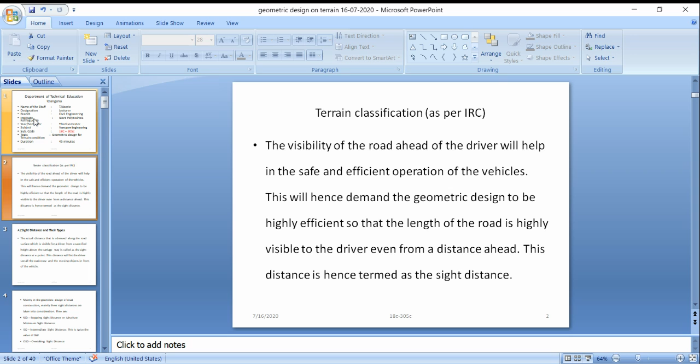So there are different types we are going to see. First, sight distance is the actual distance observed along the road surface which is visible for a driver from a specified height above the carriageway. So he should be able to observe the road surface, and a specified height should be there. There will be some height for the vehicle, and from that height he has to observe the road surface. Observing from a certain height is called the sight distance.

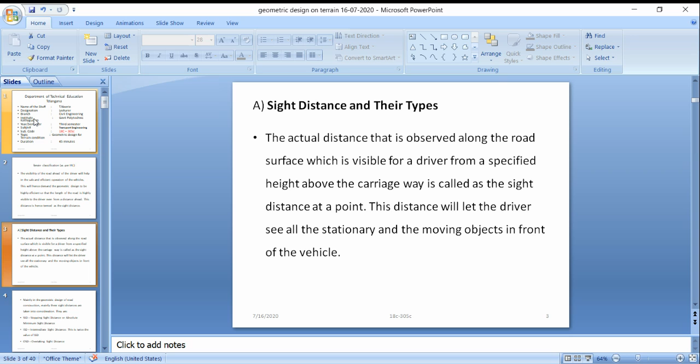This distance will let the driver see all the stationary and moving objects in front of the vehicle. So when he is driving, he can observe from that height all the stationary and moving objects in front of the vehicle. That height from the carriageway we have to fix. So that is called the sight distance.

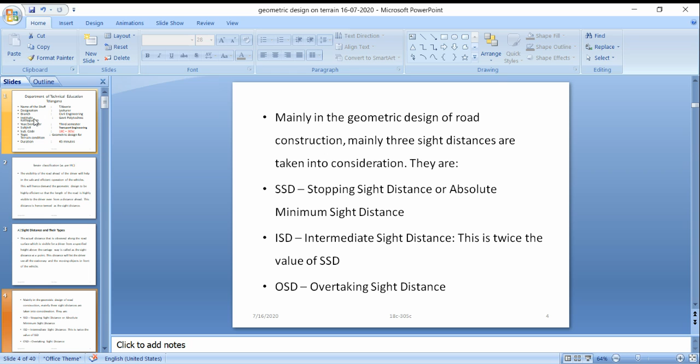Next, in the geometric design of road construction, mainly three sight distances are there. They are SSD, stopping sight distance, or absolute minimum sight distance. Next comes ISD, intermediate sight distance. This is twice the value of SSD. If the SSD is, for example, 2 meters, then our intermediate sight distance will be 4 meters, twice. Then OSD, overtaking sight distance. These are the three distances we are going to see.

In addition to these, there are headlight sight distance and safe sight distance. The distance that is available for the driver during night travel is called the headlight sight distance. When a driver is driving at night, he should also be able to see the objects at night. The distance that is available for the driver during night travel is called the headlight sight distance.

At night, the driver is facilitated by the illumination of the headlights. There we can see lots of light in the dark area. Without that, he cannot go safely. So the illumination of the headlight is also important.

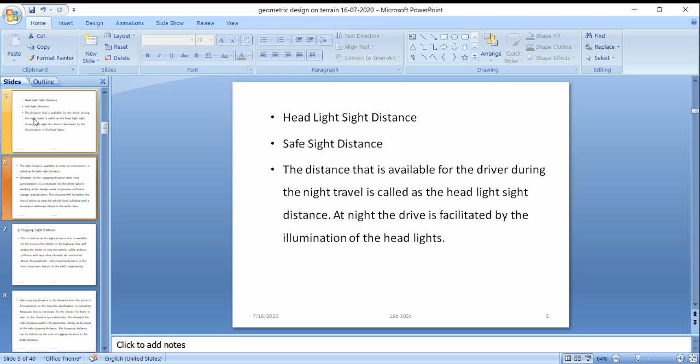So next, the sight distance available to enter an intersection is called the safe sight distance. So when he is entering the junction also, he should have an idea about the crossing, which vehicle is coming to take a turn. So that sight distance also he should have an idea of.

Whatever be the stopping distance taken into consideration, it is necessary for the driver who is traveling at a design speed to possess sufficient carriageway so that this distance will be within the line of vision to stop the vehicle. So, stopping distance taken into consideration. So here SSD we have said, that is nothing but a stopping distance. So he should have a consideration. The driver who is traveling at a design speed possesses sufficient carriageway distance.

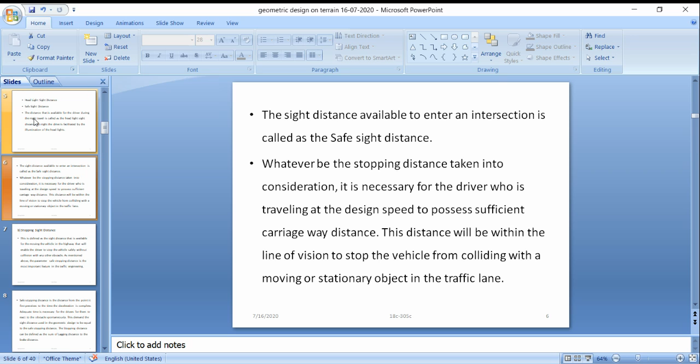We already designed for a single lane, it should be 3.75 meters. So at the design speed he was traveling, that distance will be within the line of vision to stop the vehicle from colliding with a moving or stationary object in the traffic lane. So at the junction, he doesn't have an idea what vehicle is coming around the turning. So for that line of vision, there is a chance of colliding. He should have a vision to stop the vehicle at that location.

So the stopping sight distance is defined as the sight distance that is available for the moving vehicle in the highway that will enable the driver to stop the vehicle safely without collision with any obstacle. So the main parameter for this one is the safe stopping distance, the most important feature in traffic engineering. So here we can see the stopping sight distance is available if we applied any brake, that will enable the driver to stop the vehicle safely without collision.

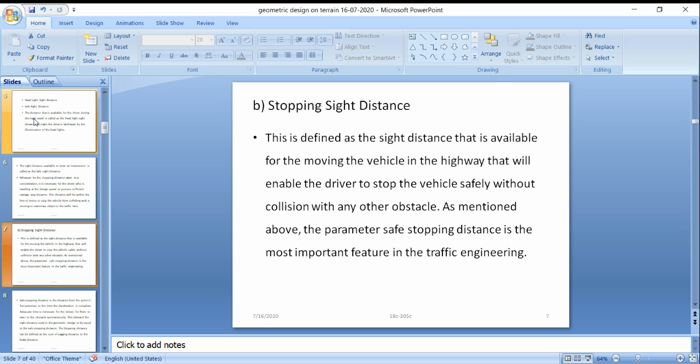Some stopping sight distance should be there. If he applies the brake, it will not stop at that location only. It will move forward. That stopping sight distance should be there for a vehicle. So that is the main parameter, and that is the safe stopping distance. Safe stopping distance is the distance from the point it first perceives to the time the deceleration is complete. So he will get a signal, and in a second, decelerate. He should stop like that, from perception to the time the deceleration is complete.

So adequate time is necessary for the driver to react to the obstacle spontaneously. So this demands the sight distance used in the geometric design to be equal to the safe stopping distance. So if you're designing a road, in that we have to see the sight distance. Safe stopping distance should be equal to the sight distance, so that the stopping distance can be defined as the sum of lag distance and braking distance. I mean to say, lag distance.

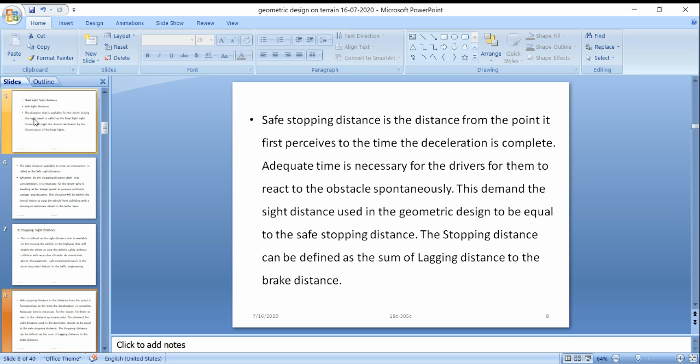It should react. The reaction will take some seconds. So those seconds are to be considered in the design, so that the vehicle can stop safely. So that lag distance is to be considered. So the lag distance is the distance that is moved by the vehicle in a time period t at a velocity of v. So applying reaction time, that is the t for a vehicle, that lag distance we are calculating.

So that lag distance is moved by the vehicle in a time period t at a velocity of v. So hence lag distance is velocity into t. That is nothing but velocity into t. So the distance that is traveled by the vehicle during the operation of braking is called the braking distance. So what is meant by the braking distance? The distance traveled after the brake is applied, that distance is called the braking distance.

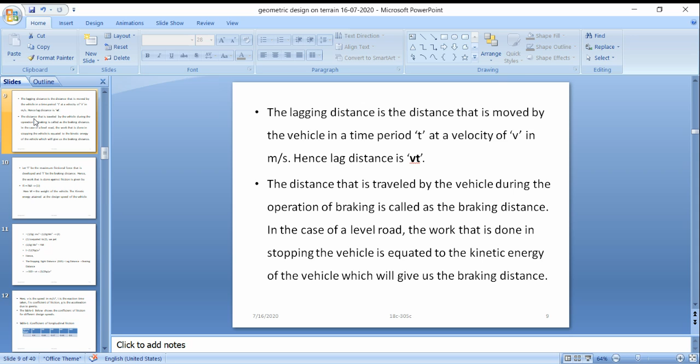In case of a level road, the work that is done in stopping the vehicle is equated to the kinetic energy of the vehicle, which will give us the braking distance. So if it is a level road, that kinetic energy will be applied for the braking distance. So next, if we are applying brakes, there we are creating some friction. Applying the brake means having the velocity, it should have the time also. Where the distance is there, we have the velocity and the time.

So sorry, there F is the frictional force that is developed and l is the braking distance. So there we are developing the F and l. So F is the frictional force and l is the braking distance. We apply the force on the vehicle. Brake force is applied means braking is done. So after the brake, the vehicle moves a little bit. That is the braking distance, and in that I have to add the weight also.

So here we are calculating the weight of the vehicle. So the weight of the vehicle, there the kinetic energy attained at the design speed of the vehicle. So here F is nothing but the frictional force into the weight of the vehicle into the braking distance. This is the equation. So here we apply the kinetic energy.

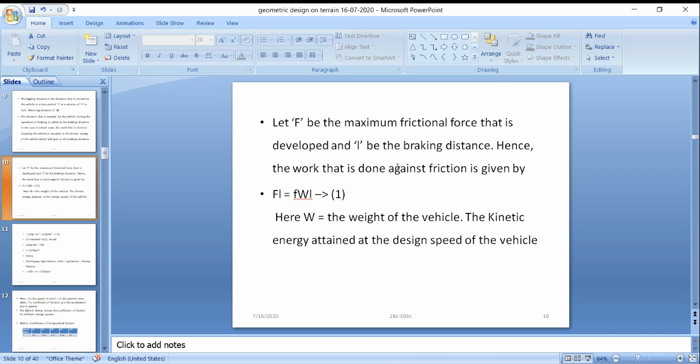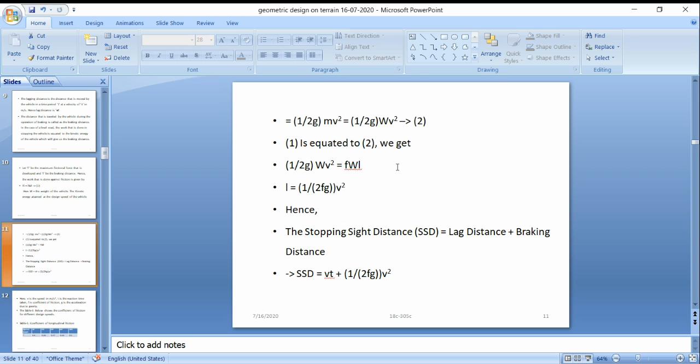And here all these were considered for the formula, Vt plus v square by 2fg. Sir, here some speed is there. For the speed less than 40, it should be 0.4, and if it is 40, 0.38, let the friction as given.

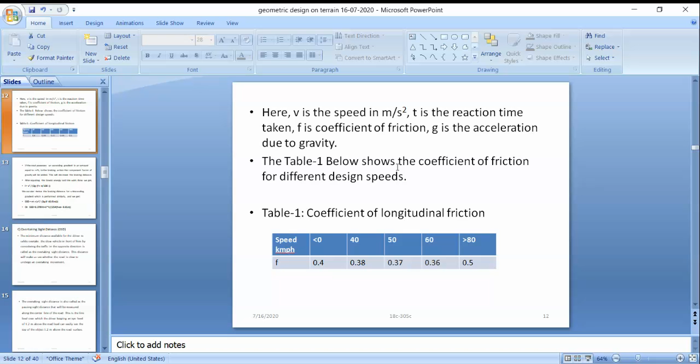If the road has an ascending gradient of n percentage, the component of gravity is added to the braking action. This will decrease the braking distance. After equating the kinetic energy and the work done, the formula is Vt plus v square by 2g into f plus n by 100.

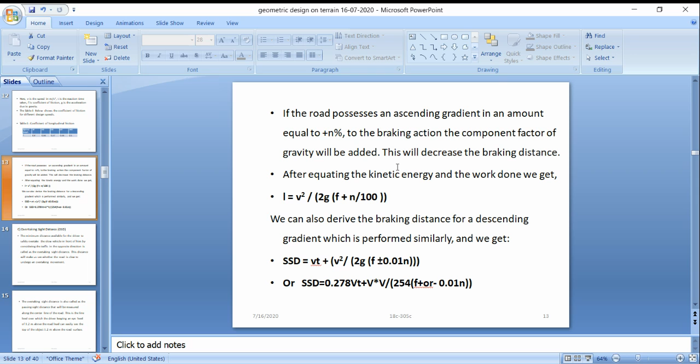So he also derived the braking distance for a descending gradient, so the stopping sight distance is equal to Vt plus V square by 2g into f plus or minus 0.01 n. Or it can be written as SSD equal to 0.278 Vt plus V square by 254 into f plus or minus 0.01 n. So this is the stopping sight distance formula.

Next comes the overtaking sight distance. Here the minimum distance available for the driver to safely overtake the slow vehicle in front of him by considering the traffic in the opposite direction is called the overtaking sight distance. So this distance will make us see whether the road is clear to undergo an overtaking movement.

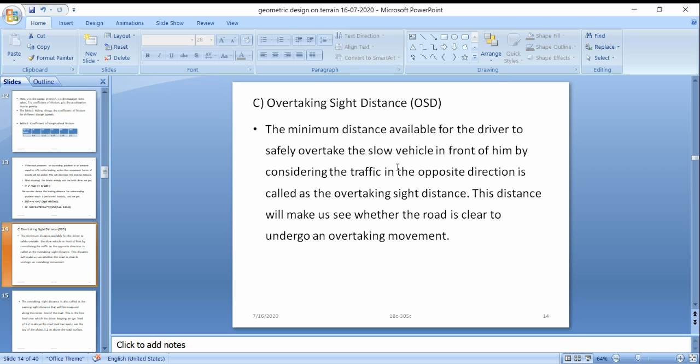So if we're going to overtake, we have to have visibility of whether the road is clear to overtake or not. We already saw the geometric design of carriageway width. As per the IRC, a single lane is 3.75, the vehicle width is 2.44, and for side clearances it comes 0.68 plus 0.68 on either side. So that much distance is provided to see whether the vehicle can overtake or not.

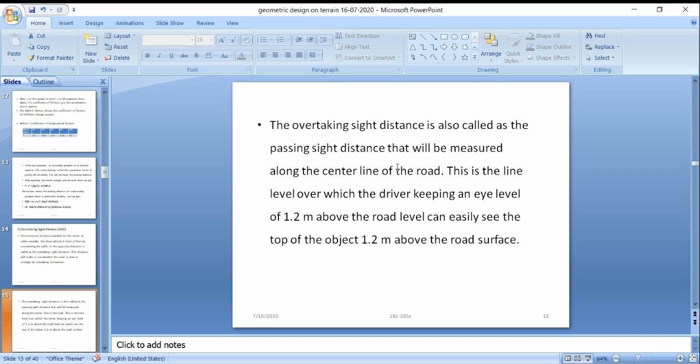Okay, so the overtaking sight distance is also called the passing sight distance, measured along the center line of the road, with the driver's eye level at 1.2 meters above the road level. So he can easily see the top of the object above the road surface. On the moving vehicle he can see objects at a height of 1.2 meters.

So what are the factors affecting overtaking? The first factor is the spacing between the vehicles. If you want to overtake, the space should be there to overtake the vehicle. Next, speed of the vehicle. If you want to overtake, he will increase the speed. Next, the gradient of the road. If the road is more steep, then the gradient is also considered.

The acceleration rate of the overtaking vehicle, whether he can go or not. Velocity of the vehicle, and also the driver's skill and the reaction of the driver. So with all these, the driver also has to think whether he can overtake or not.

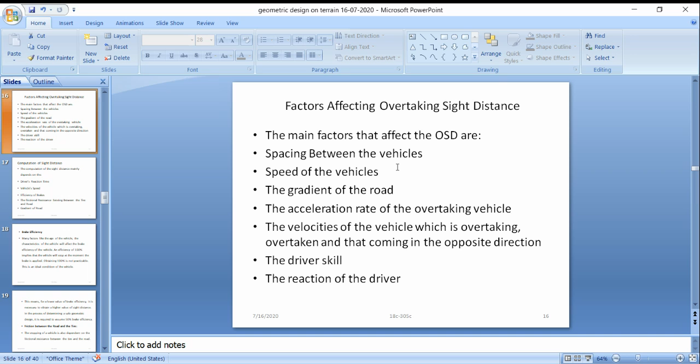It will depend upon, if it is a heavy loaded vehicle, then it will depend on the skill of the driver. If suddenly, while overtaking, anything unexpected like animals is there, then the reaction of the driver is also important at the time of overtaking.

So, for the sight distance, we have seen stopping sight distance, intermediate sight distance, and overtaking sight distance. So the sight distance really depends upon the driver reaction time. So first main consideration for

the formula we have considered, SSD, stopping sight distance, is 0.278 Vt plus V square by 254 into (f plus or minus 0.01 n). That formula we have seen. So in that we have seen that first is the driver reaction time, vehicle speed.

After reacting only, we can say the vehicle speed and also efficiency of the brake, the frictional resistance existing between the tire and the road, whether the road is wet, weather conditions also apply. So on the weather conditions only, the tire and road friction will be developed, and gradient of the road. So the sight distance will depend on all these factors.

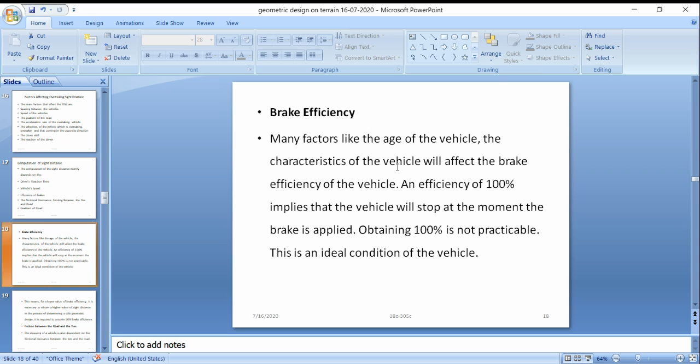The characteristics of the vehicle, and efficiency of 100% implies that the vehicle will stop at the moment the brake is applied. So obtaining 100% is not practical. This is an ideal condition of the vehicle. So at the design, we will think the brake applied will be 100% possible, but practically it's not possible. It is an ideal condition depending upon whether the brake is suddenly applied or not.

So this means for a lower value of the brake efficiency, it is necessary to obtain a higher value of sight distance. So, in the process of determining a safe geometric design, it is required to assume 50% brake efficiency. So for braking, we have to consider not 100%. We have to take 50% only.

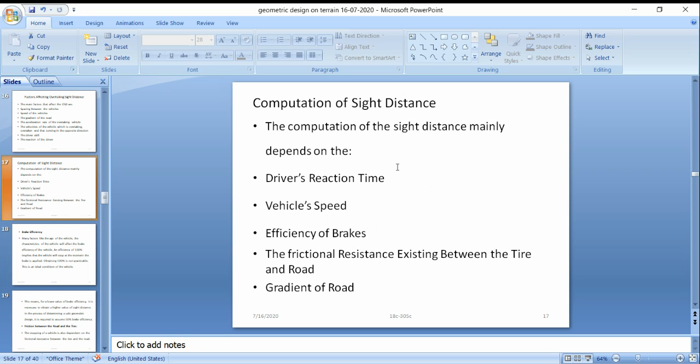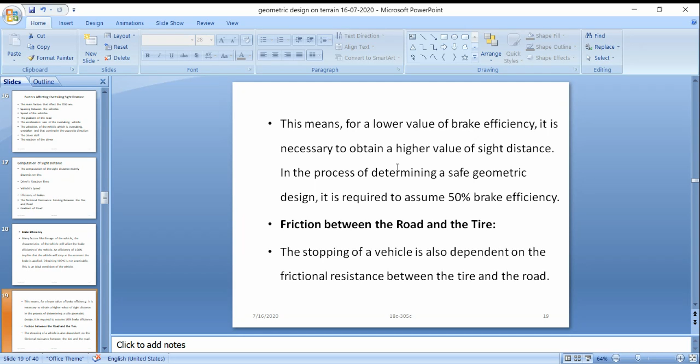So next comes the friction between the road and the tire. We have seen different factors here: driver reaction time, the vehicle speed, efficiency of the brake, friction between the tire and road, and gradient of the road. So next comes friction between the road and the tire. The stopping of a vehicle also depends on the frictional resistance between the tire and the road.

So the stopping of the vehicle is also dependent on the frictional resistance between the tire and the road. Having a higher value of frictional resistance will result in efficient stopping of the vehicle. If the frictional resistance is more, then the vehicle stops efficiently when the brake is applied. So here the sight distance required will be less during the computation of the sight distance. So no special provisions are required for the brake efficiency.

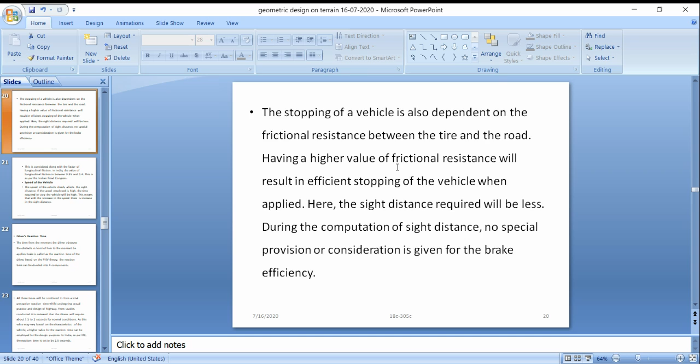So this is considered along with the factor of longitudinal friction. So in India generally we take the longitudinal coefficient of friction f as 0.35 to 0.4. This is the value of friction recommended by the Indian IRC.

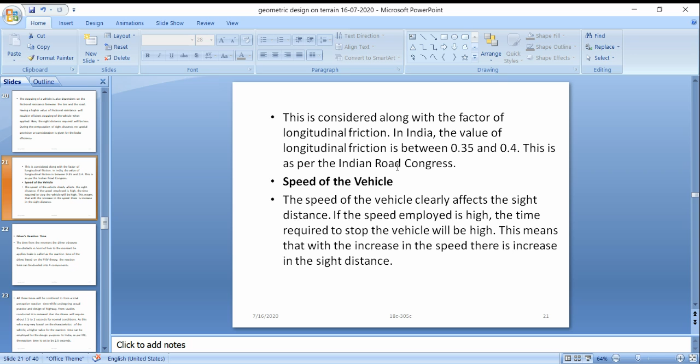Next comes the speed of the vehicle. The speed of the vehicle clearly affects the sight distance. If the speed employed is high, the time required to stop the vehicle will be high. This means that with the increase in speed, there is an increase in the sight distance. If you suddenly apply the brake, the vehicle moves a little. To stop the vehicle, it requires a little distance, that is the sight distance required.

So next comes driver reaction time. The driver will have to react, then only, to stop the vehicle. Stop the vehicle means to apply the brake. So all these factors depend upon the driver reaction. The time from the moment the driver observes the obstacle in front of him to the moment the brake is applied is called the reaction time.

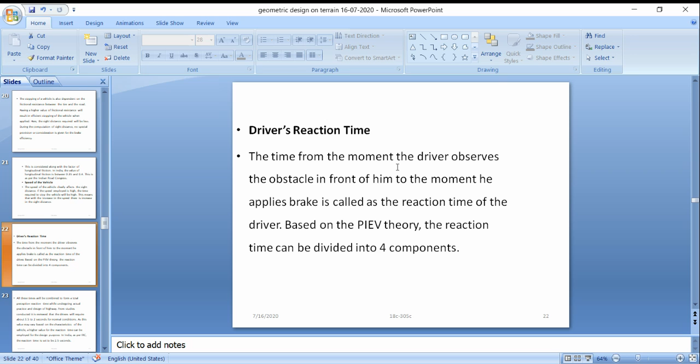So when he sees any object or obstacle in front of him, he reacts to apply the brake. That is called the reaction time. So based on this PIEV theory, it is divided into four components.

All this time will be combined to form a total perception reaction time while undergoing actual practice and design of highways, so that the reaction time will be 1.5 to 2 seconds under normal conditions. So for normal conditions, a person will react in between 1.5 to 2 seconds for applying the brake.

Does this value vary based on the characteristics of the vehicle? How fast he will react, and whether he wants to apply the brake, also depends upon the vehicle, whether it's a heavy loaded vehicle or not, and how fast it is going. So a higher value for the reaction time can be employed for design purposes.

As per the IRC, it is taken as 2.5 seconds. It also depends upon the person - it may vary if it's a child, a youngster, or a middle-aged person. The reaction time and perception time will also vary. So generally, as per IRC, it is considered as 2.5 seconds.

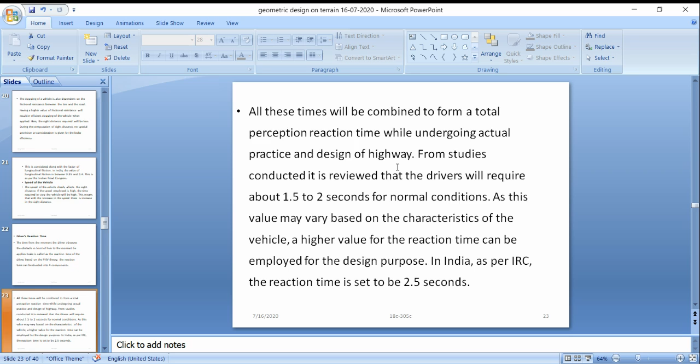Next comes the gradient. What do you mean by gradient? In geometric design, we are considering the gradient also. The sight distance is greatly influenced by the gradient of the road.

There are chances of the vehicle having to stop suddenly when it is climbing. So if the vehicle is going on higher areas, climbing higher areas, these situations ask for a small sight distance. When the vehicle is moving down, the movement is supported by the gravity action. So moving up and moving down on hilly areas, it all depends upon the gravitational force.

So this should be seen in balance. This will hence ask for more time to stop the vehicle. If the vehicle is coming down and you apply the brake, it will not stop easily. So we have to see how much gradient we have to provide for the road - that is more important. So they require more sight distance

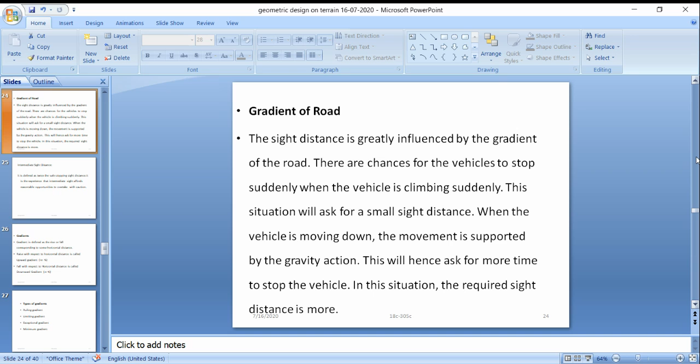in the case of gradient roads, or you can say in hilly areas - there it requires more sight distance. Before, we have seen that sight distance should account for about 2.5 seconds as reaction time, and it will take time to apply the brake. But here, if we apply the brake, the sight distance should be more compared to the plain terrain. So that is about the gradient.

Next comes the intermediate sight distance. Intermediate sight distance is defined as twice the safe stopping sight distance. It is experienced that intermediate sight distance affords reasonable opportunity to overtake with caution.

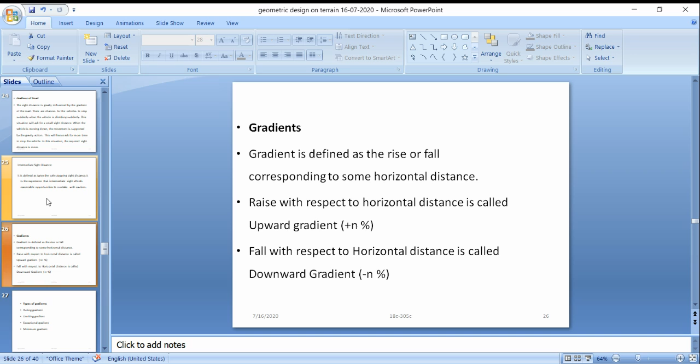Next comes gradients. Gradient is defined as the rise or fall corresponding to some horizontal distance - that is called a gradient. An upward gradient is considered as plus n percentage, and a downward gradient is negative. If it is positive, plus 1%, plus 2%, like that, we get a gradient - plus means rise. If we go for minus, it indicates a fall, with respect to the horizontal distance.

Next comes the different types of gradients. In this we see the ruling gradient, limiting gradient, exceptional gradient, and minimum gradient. First comes the ruling gradient - this is the maximum gradient which is generally used to design the vertical profile of highways. It is also called the design gradient.

This gradient depends upon the terrain, length of the grade, speed, pulling power of the vehicle, and the presence of horizontal curves. It is adopted by considering a particular design speed and a design vehicle with standard dimensions. In flat terrains, it is possible to provide flat gradients, but in hilly areas it is very costly, and sometimes difficult to provide the ruling gradient.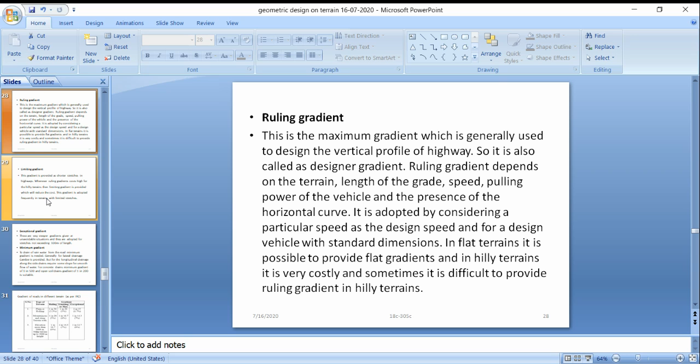So if it is provided for hilly areas, then the gradient - in flat terrains it is possible to provide flat gradients, but in hilly areas it is very costly to provide the ruling gradient. Next comes the limiting gradient.

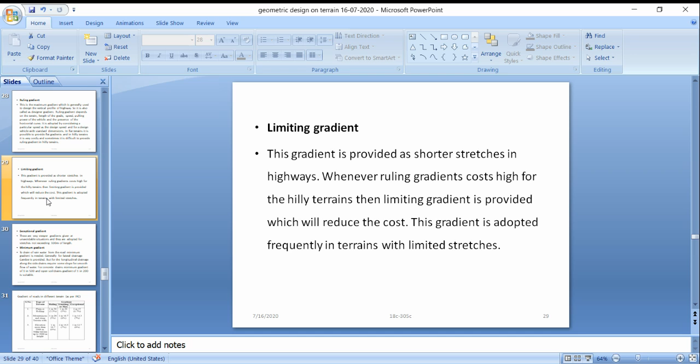The limiting gradient is used where for shorter stretches the inclination is more, so compared to the ruling gradient its cost is higher, and it's for hilly terrains. There we have to provide the limiting gradient, which will reduce the cost. This gradient is adopted frequently in terrains with limited stretches. If provided for plain terrain, it will be provided only for limited stretches, but a limiting gradient is generally suitable for hilly terrains. Next comes the exceptional gradient.

Exceptional gradients are steeper gradients given at unavoidable situations, where the gradient is more. Generally we cannot escape providing that exceptional gradient, so we go for it, and it is adopted for a stretch not exceeding 100 meters in length, not more than that.

Then comes minimum gradient, which is provided to drain off water from the road. Minimum gradient is camber, which we have already seen. It is generally for lateral drainage. But for longitudinal drainage along the side drains, it requires some slope.

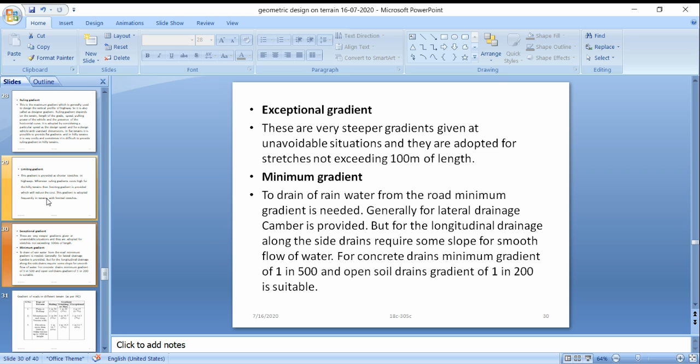So for smooth flow of water, concrete drains are provided a slope of 1 in 500, and open soil drains 1 in 200. So the minimum gradient is provided throughout the longitudinal section, while camber is only for the cross section, providing for the movement of drainage water on the road.

So here different gradients are given for the roads. For plain or rolling terrain, the ruling gradient should be 1 in 30, the limiting gradient is 1 in 20, and the exceptional gradient is 1 in 15.

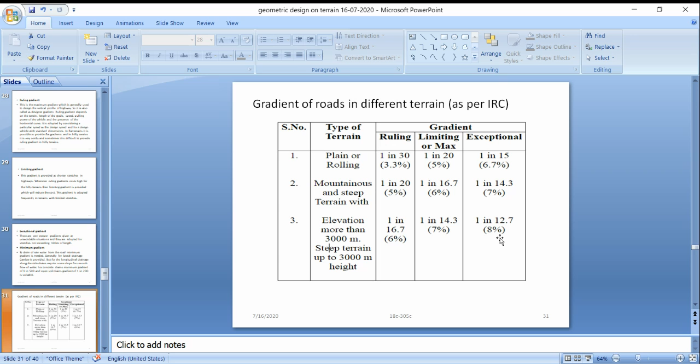For mountainous and steep terrain, the ruling gradient is generally 1 in 20, the limiting gradient is 1 in 16.7, and the exceptional is 1 in 14.3. Where the elevation is more than 3000 meters, that is, steep terrain, we provide the ruling gradient as 1 in 16.7, the limiting gradient as 1 in 14.3, and the exceptional as 1 in 12.7, so about 8 percentage.

Next comes super elevation. Super elevation is nothing but balancing the vehicle on the road at the curve portion.

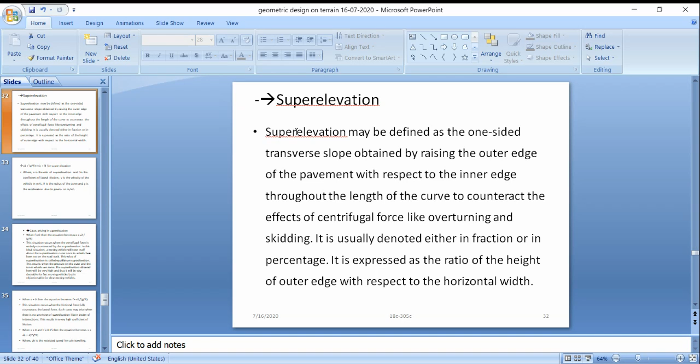Super elevation may be defined as the one-sided transverse slope obtained by raising the outer edge of the pavement with respect to the inner edge throughout the curve, to counteract the effect of centrifugal forces.

Here we get centrifugal forces when a vehicle is overturning, there are chances of skidding of the vehicle. So centrifugal force will be there, and super elevation is used to counteract it at the turning places.

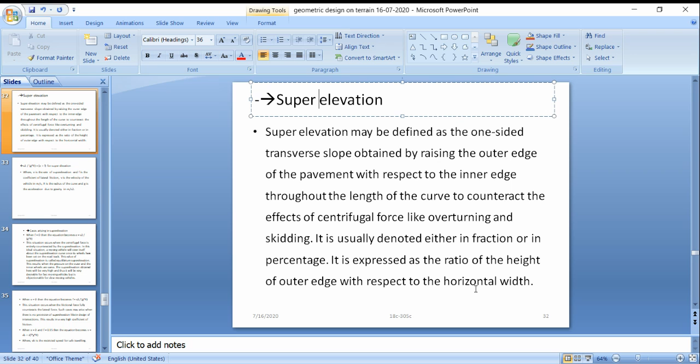It is usually denoted either in fraction or in percentage. So super elevation is expressed as the ratio of the height of the outer edge with respect to the horizontal width.

The formula is V squared by G into R equals E plus F, for the super elevation, where E is the rate of super elevation, F is the coefficient of lateral friction, V is the velocity of the vehicle, R is the radius of the curve, and G is the acceleration due to gravity.

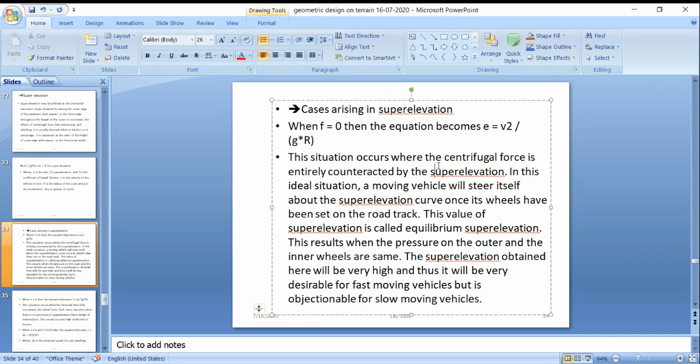Now, where do the super elevation cases arise? When F equals 0, the formula becomes E equals V squared by GR. This situation occurs when the centrifugal force is entirely counteracted by the super elevation, so the lateral friction will be 0, meaning the centrifugal force is completely balanced by the super elevation.

In this ideal situation, a moving vehicle will steer itself about the super elevated curve once its wheels have been set on the road track. This super elevation is called equilibrium, resulting when the pressure on the outer and inner wheels is the same.

This super elevation obtained with lateral friction 0 will be very high, and thus it will be desirable for fast moving vehicles, but it is objectionable for slow moving vehicles. So it is not suitable for slow moving vehicles.

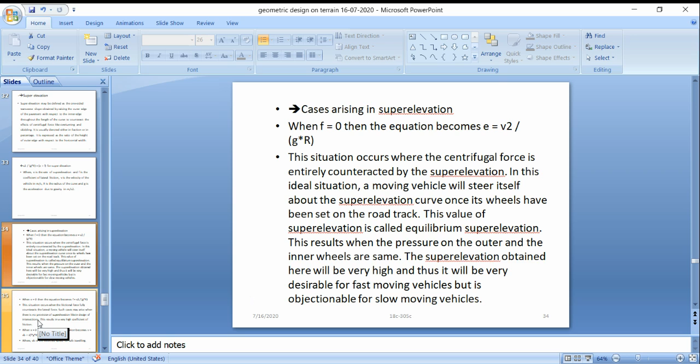Next, we come to the case where E equals 0.

So E is nothing but the super elevation ratio. So when E equal to 0, then F equal to V square by G into R.

So this situation occurs when the frictional force fully counteracts the lateral force. Such cases may arise when there is no provision of super elevation, so the factor of friction is applied. This is the design of intersection, where two roads intersect as crossroads, the super elevation will be 0 and friction will be developed. So this will give E equal to 0 and F equal to 0.15.

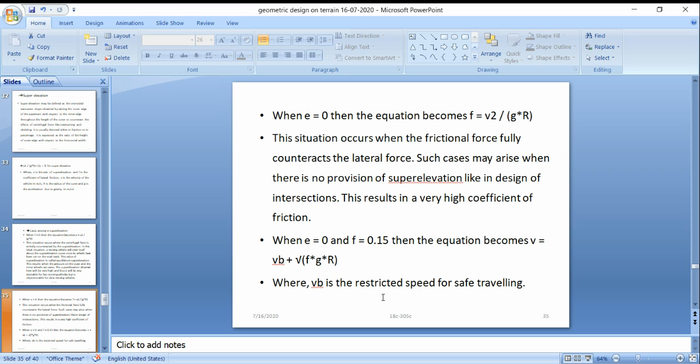That equation becomes V equal to VB plus root of F into G into R. So VB is nothing but the restricted speed, where the super elevation getting 0 means the speed is restricted.

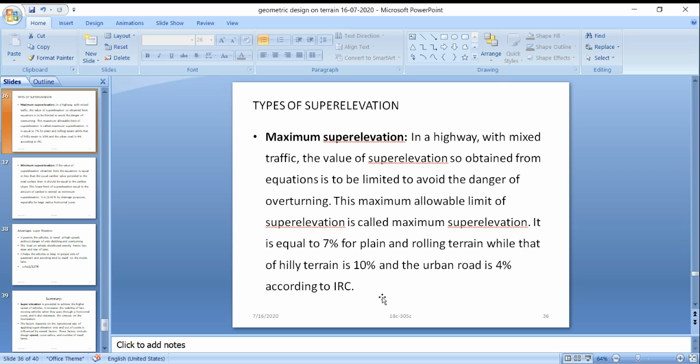Next, maximum super elevation. In a highway with mixed traffic, the value of super elevation obtained from the equation is to be limited to avoid the danger of overturning. This maximum allowable limit is 7% for plain areas and 10% for hilly areas. If it is an urban road, then it is 4%. So this restricts how much super elevation is to be provided for different terrains.

A minimum super elevation is to be provided if the value of super elevation obtained from the equation is equal to or less than the camber value usually provided to the road surface, then it should be equal to the camber slope, that is, equal to the amount of camber. This is termed as minimum super elevation.

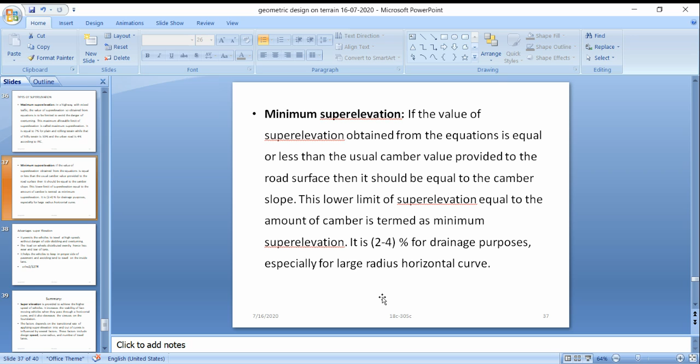It is 2 to 4% for drainage purpose, especially for large radius horizontal curves. So for any curve, minimum super elevation has to be provided. If it is a large curve, minimum has to be provided, that is 2 to 4%, for drainage purpose.

Next comes the advantages of super elevation. It permits a vehicle to travel at high speed without danger of side skidding and overturning. So if we provide the super elevation at the turning or at the curves, then it will provide safe turning for the vehicles which will counteract the centrifugal forces, and it will balance the equilibrium of the vehicle at the turning places.

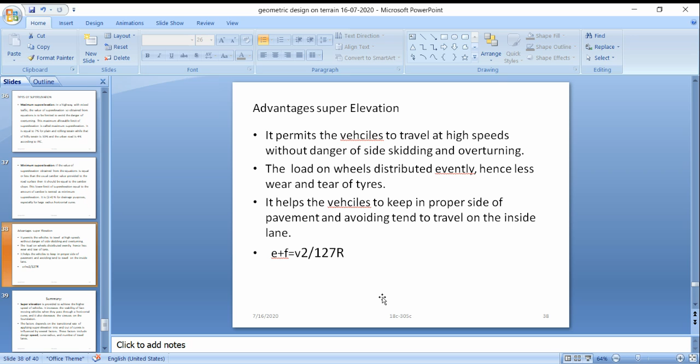So for this purpose we provide the super elevation. The load on wheels is distributed evenly, hence less wear and tear of tires will occur. It helps the vehicle to keep in a proper side of the pavement and avoid the tendency to travel to the inside of the lane. So here we have E plus F equal to V square by 127 R.

So here we have covered about the super elevation. Super elevation is provided to achieve higher speed of the vehicle. It increases stability of a moving vehicle when it passes through a horizontal curve. If we pass through the horizontal curve, it should have stability also.

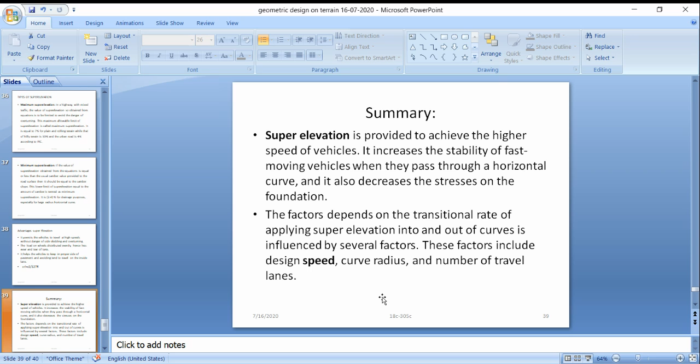So for that only we are providing the super elevation, and it also decreases the stress on the foundation, because if the vehicle speed is more and the load of the vehicle is not distributed, then more burden is on the foundation. So the factors on which the transitional rate of super elevation depends are design speed, curve radius, and number of travel lanes. These are also important factors.

Next, we have seen about the gradient. It is the rate of rise or fall of a road level along its length. It is expressed as either the rate of rise or fall over the horizontal distance.

Gradient is a measure of how steep a slope or a line is. Gradients can be calculated by dividing the vertical height by the horizontal distance. That is how we calculate the gradient.

In gradient we have seen different types: ruling gradient, limiting gradient, exceptional gradient, and minimum gradient. Ruling gradient is the general gradient which we already provided. Limiting gradient is generally provided for hilly areas. Exceptional gradient is not allowed, unless allowed for only 100 meters.